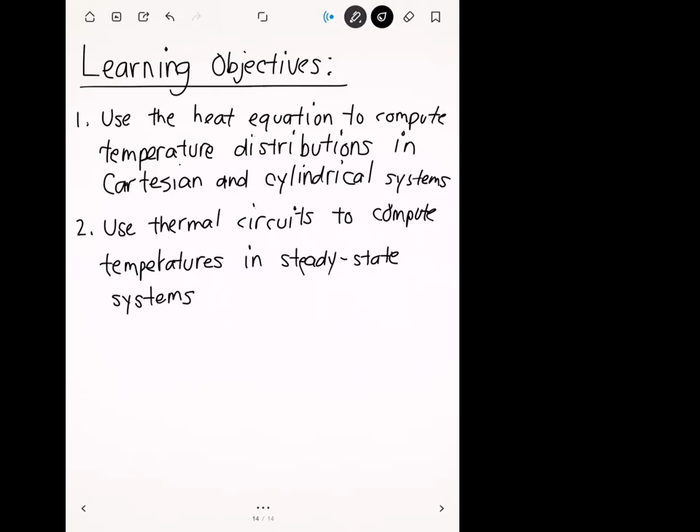So I finished writing up the homework yesterday, and I'm glad that people have already taken a look at it and started, because I think that'll make today's lecture a lot more worth it.

So the first thing I want to do today is a couple of examples. One is a heat equation example, where we're going to take the whole heat equation, integrate it, and apply boundary conditions — that should help you out on problem 2. The other example we'll do today is a thermal circuit problem, which should help you out on problems 3 and 4.

After that, we'll probably have some time left, so we'll start the next set of lecture notes, which is on radial systems. We'll see how the same concepts we've been learning apply to cylindrical coordinates and then eventually spherical, although I don't think we'll get to spherical coordinates today just yet.

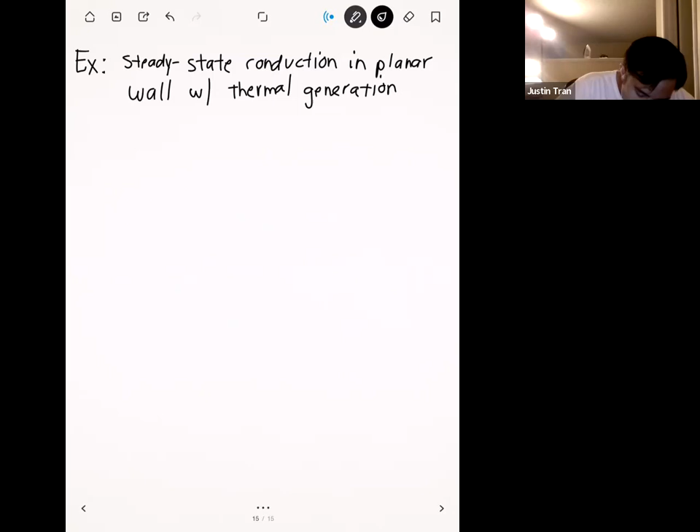Basically we're assuming that maybe this wall is laced with a chemical that's reacting and producing heat, or maybe it's a material that absorbs heat from somewhere else. So the diagram looks something like this: here's our planar wall, and just like before, we're viewing a cross section of the wall.

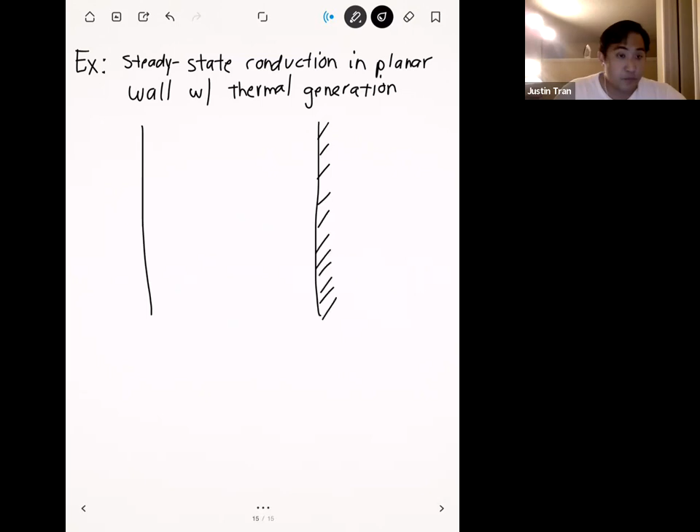On the left side of the wall we have convection going on. The three arrows indicate that fluid is flowing past the wall. The ambient temperature of the fluid is about air temperature, maybe a little chilly outside, so the ambient temperature is 20 degrees C, and the convection coefficient is 500 watts per meter squared degrees C.

We also know the thickness of the wall. The length of the wall is 50 millimeters, and the thermal conductivity K of the wall is 5 watts per meter degree C.

One more thing we have, which is actually a little unique for this problem: usually with a convection boundary condition you don't know the surface temperature, but in this case we do. The temperature of the wall, which we'll call TS for surface temperature, is 120 degrees C.

On the right side of this wall, notice I've marked it with hash marks, which indicates that side is perfectly insulated. If you recall from previous lectures, when something is perfectly insulated, no heat can escape through that wall, so the heat transfer rate through that wall is going to be 0.

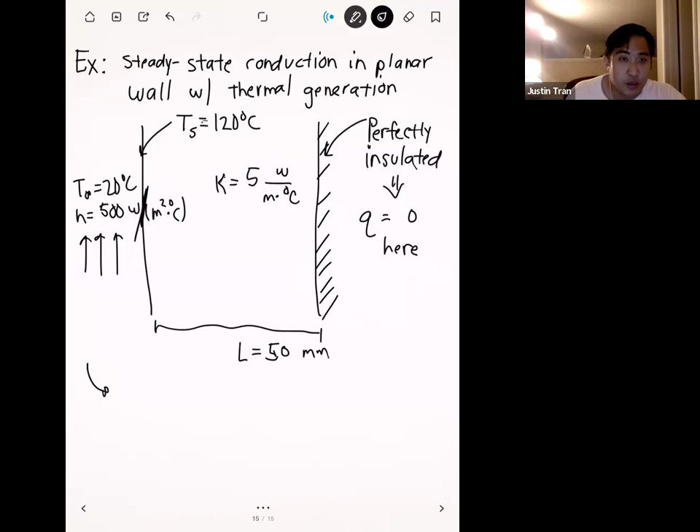Alright, I think that's all. So what we're interested in solving for here is the heat equation for the temperature distribution in the wall.

Okay, so that's part A of the problem. Part B says that, given these thermal conditions, we want to solve for how much heat the wall has generated.

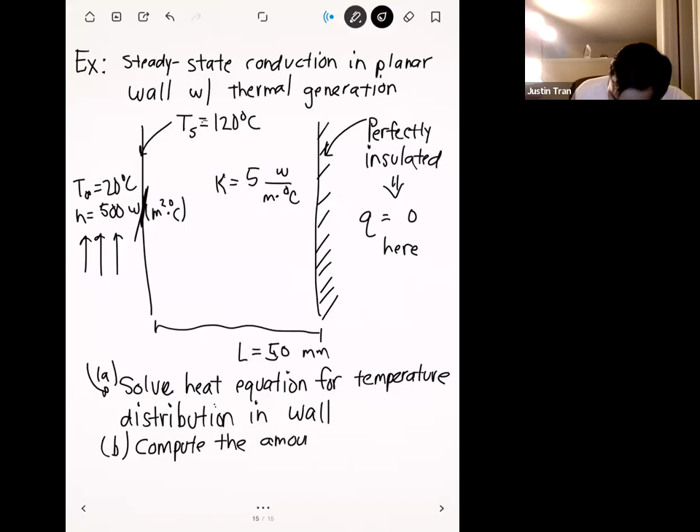In other words, what we're solving for here is the value for Q dot. Basically, we're going to take our solution for part A, along with all the boundary conditions we have on this problem, and use that to solve for Q dot.

Notice that we actually have 3 boundary conditions here, which is a little unusual. Usually we're only given 2, since we only need 2 boundary conditions to solve a second order ODE. But we have an additional unknown, the thermal generation, so we need three boundary conditions: our insulated condition on the right, our surface temperature on the left, and a convection boundary condition as well. These are the 3 boundary conditions we'll use to solve parts A and B.

Before I move on, since I got a few questions about this last night, I want to draw a distinction between these two things. I got a lot of questions asking about problem 2: is it correct to apply a specified temperature boundary condition when you have convection like that? I was telling people that would not be correct, because even though we have fluid flowing with a certain temperature on the outside of our surface, that doesn't mean our solid surface has the same temperature. In fact, most of the time they're quite different from each other.

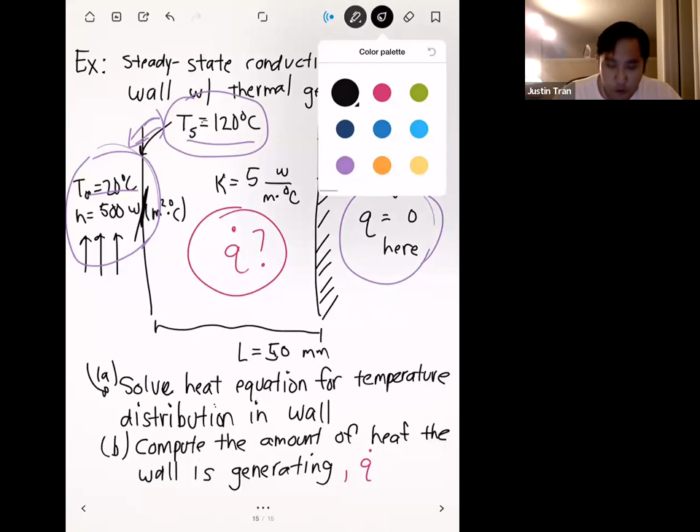Let's start with part A. Since we're looking for a temperature distribution in this problem, remember, temperature distribution means we're going to solve for a function T of x. That means we know this is a heat equation type problem. So let's go ahead and start from the full heat equation.

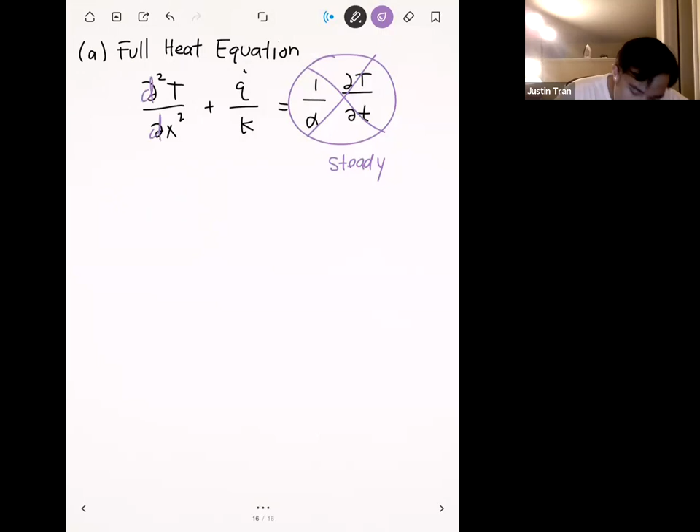Our full heat equation is partial squared T partial x squared plus q dot over k equals 1 over alpha partial T over partial t. The first thing we're going to do, just because it said so in the problem, is cross out this term right here, because we're assuming the problem is steady. By doing that, since we eliminate the time derivative, these derivatives on space become regular derivatives.

Now that the right-hand side is equal to 0, I'm going to move the q dot over k to the left-hand side. So we have d squared T dx squared is equal to minus q dot over k.

We don't know what q dot is yet, but we are going to assume that it's constant. That helps us out a lot because it allows us to directly integrate this expression, so we're going to have dx. Let me go ahead and write that down: assume constant.

On the right-hand side, we basically just have a number, a scalar. So if we take the integral of both sides, on the left-hand side we're left with dT dx, and on the right-hand side we have minus q dot over k times x plus c1, because the integral of a constant is just that constant times x. And since we're doing an indefinite integral, we have to add an arbitrary constant c1.

Then we're going to integrate this one more time in order to get T of x. We integrate one more time and we get minus q dot over 2k times x squared plus c1 times x plus c2, where again the c2 comes because we're doing an indefinite integral and we have to add our arbitrary constant. And so here is our general solution.

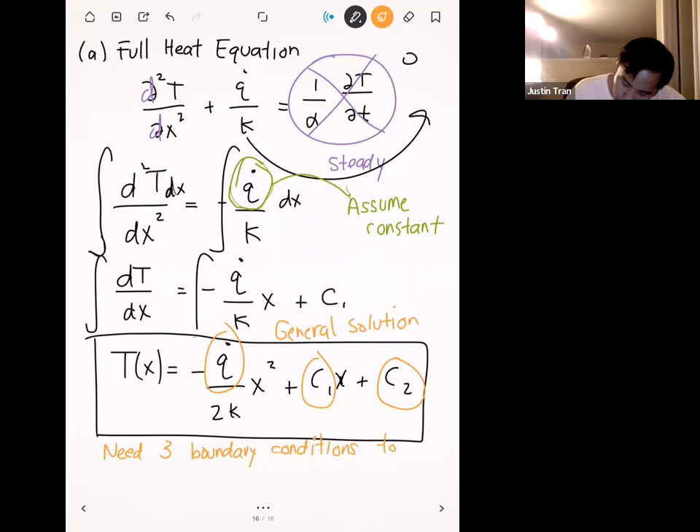And so we're going to use our 3 boundary conditions to solve for those values. On the next page, I'm going to write out our 3 boundary conditions in mathematical form, and then we're just going to simply apply that to the equation, in order to get its value. Any questions on this?

And so we have 3 boundary conditions in this example.

All right, so our first boundary condition is a specified surface temperature at x is equal to 0. Remember that surface temperature was Ts equal to 120 degrees C, right? And so in mathematical form, we can express this by saying that our temperature distribution at x equal to 0 is equal to 120.

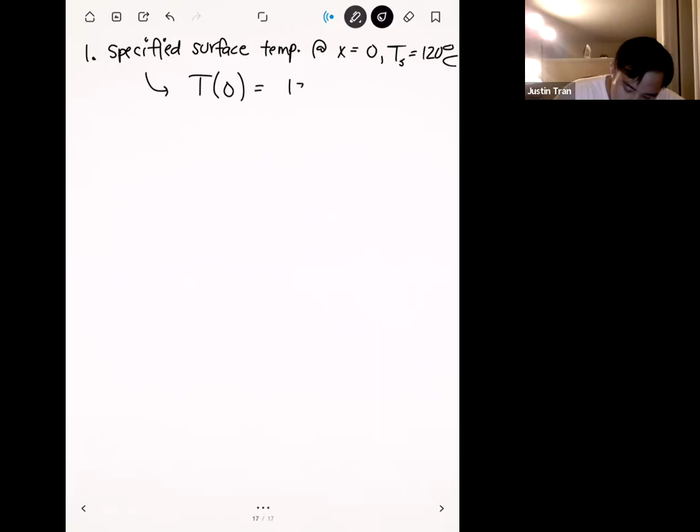Is this for part B? This is still part A. So part A, we're still solving for C1 and C2.

So this one's actually really easy to apply, so let's go ahead and apply this one first. This isn't the formal textbook way to approach these problems, but it's a good trick. Usually whenever you have a general solution that depends on x, applying the boundary condition at x equal to 0 is usually a good first way to go, because a lot of terms are just going to cancel, especially if it's a specified temperature boundary condition like this.

So let's go ahead and apply this right away because we know a lot of terms are going to cancel. If we go back to our general solution: minus q dot over 2k times x squared plus C1 x plus C2.

If we apply this at x is equal to 0, we're basically going to plug in 0 at every location where we have x. So we have 0 here, 0 here, and that's going to cancel out all of those terms, because we have 0 times a constant, which is 0. And according to the boundary condition, if we apply x equal to 0, then we're going to get 120 degrees C.

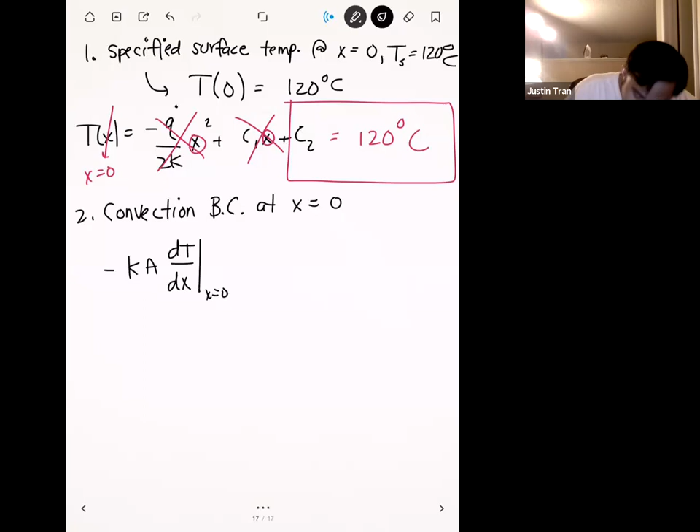And so it's a balance between conduction and convection. For the conduction side, we have Fourier's law: minus k times A times dT/dx, at x is equal to 0. This side of the equation is conduction, because it's Fourier's law.

And so the other side of the equation is going to be our convection. For convection, we use Newton's law of cooling: H times A times T infinity minus T at 0.

And so when you have a convection type boundary condition, we have to set both of these equal to each other. The key thing to notice here is that for these two entities, we're going to plug in our general temperature solution.

All right, so let's go ahead and plug these in. The good thing about the right-hand side, T at 0, we already know what that is because we solved for it in condition 1. We know that this one is 120 degrees C. So the only goal here is to plug it in for the other one.

All right, so if we go ahead and take the derivative of our general solution, the derivative of our general solution is minus q dot over k times x plus C1.

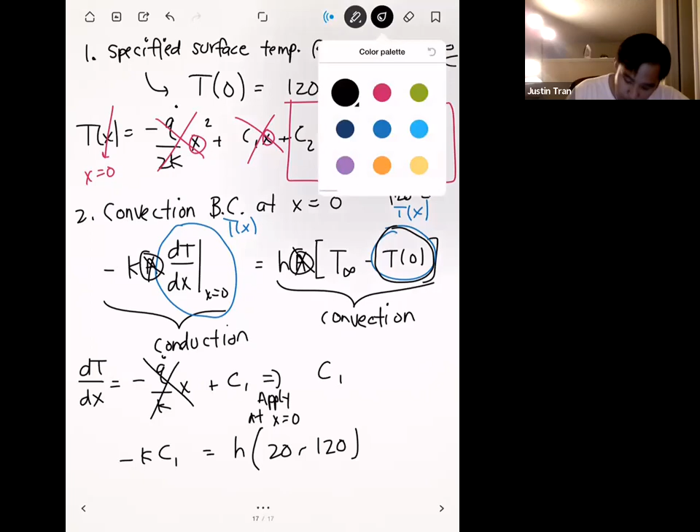K here has a value of 5 watts per meter degree C. And H here has a value of 500 watts per meter squared degree C. Those are given to us directly in the problem. So the only unknown we have in this equation right now is C1. And so we can go ahead and plug all the values in and solve for the value of C1.

Any questions on how we applied this convection boundary condition? I had a question, Professor.

Could you go over one more time why you use negative q dot over kx plus C1, when dT over dx is equal to negative q dot over kx plus C1? Sure. That's simply just the derivative of our general solution, which is this one here from the previous page. So all I did was take the derivative of this expression with respect to x. Oh okay, so that's dT/dx, that's what that's equal to. Gotcha. Exactly. And actually, because we got this by integrating our heat equation, you can see that we actually have the expression for dT/dx right here on the spot, right before we got to our general solution. So just plug that in on that side. Thank you.

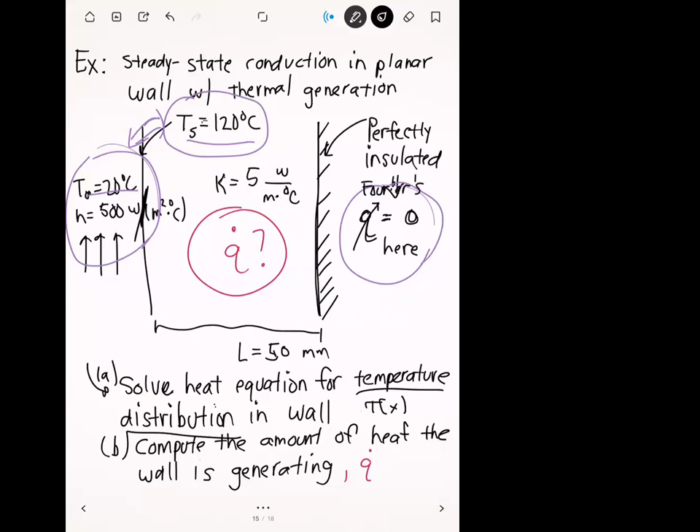And this is all going to be equal to 0 because of the insulated wall. So let's go ahead and plug that in. Right now we have minus k times a, and actually, because we have 0 on both sides, we can go ahead and divide by k times a on both sides of the equation, and that's going to cancel those out. So we have simply dT/dx at x equal to L is equal to 0.

If we plug in our expression for dT/dx, which is minus q dot over k times x plus C1, we have C1, and C1 is 10,000. In this case, we're going to plug in x is equal to L, where L is 50 millimeters, which is 0.05 meters. Then we can go ahead and solve this expression for q. So we plug everything in, we get minus q dot all over k, where k is 5 watts per meter degree C, times 0.05 meters, this is equal to minus C1, and that's minus 10,000.

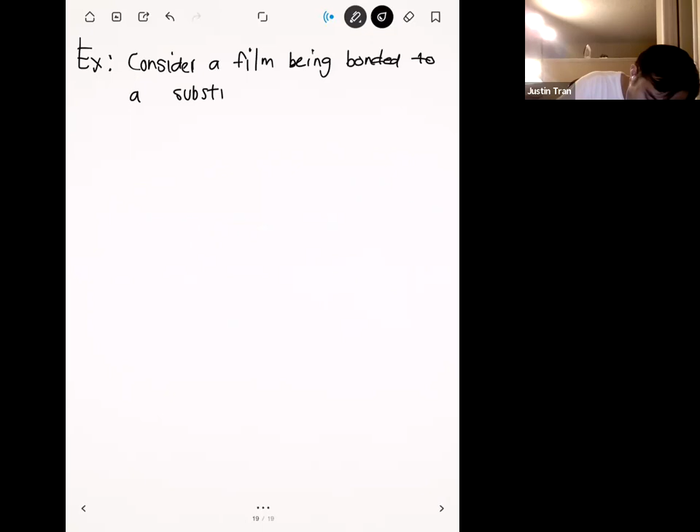I don't think we've discussed what heat flux is, so I'll make sure to talk about that once we get there. Basically, what's happening is that the laboratory is applying some kind of radiation to heat that interface between the film and the substrate.

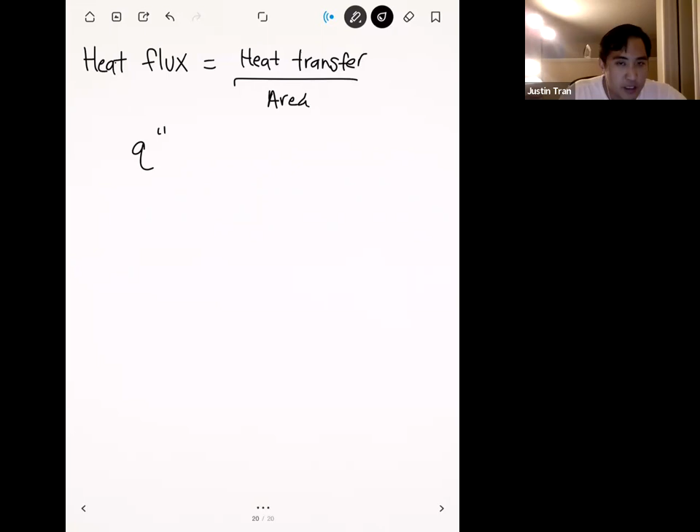The most common symbol you'll see for heat flux is usually given the double prime sign. The relationship between Q double prime and Q is that Q double prime is equal to Q divided by A. So that's all that heat flux is. Heat flux is simply just little q, divided by A.

All right, so let's start with part A. Part A of the problem is we're going to draw the thermal circuit that represents the situation.

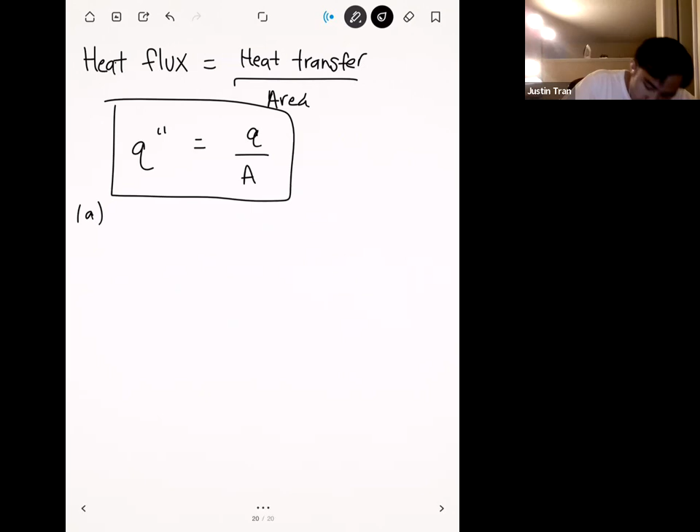We have 3 resistors here because we have the 2 solid layers, and we also have convection. So we're going to draw 3 resistors.

We'll call this resistor R air, because this is the convection resistance of the air. This is going to be the conduction resistance of the film. And then that resistor is going to be the resistance of the substrate.

Okay, so let's go ahead and fill in the values for these resistances. Remember, convection resistance is just going to be 1 divided by H times A.

The film resistance here is just going to be LF divided by KF times A. And then the substrate resistance is just LS divided by KS times A.

And the next thing we're going to draw in is the interface between the film and the substrate, because that's where things are going to take place.

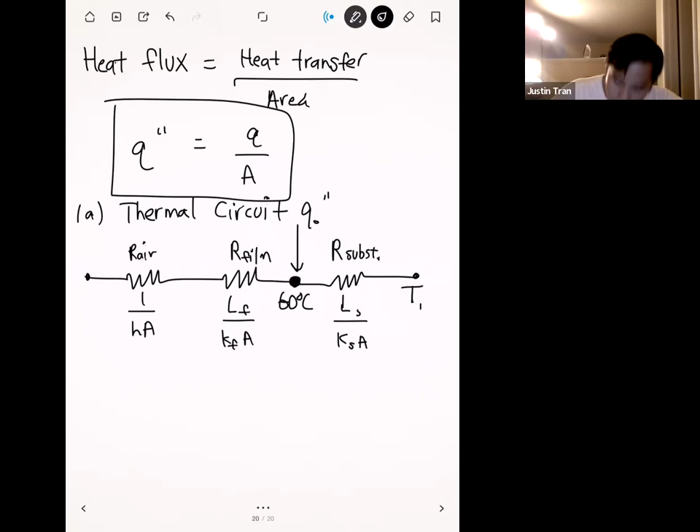The last thing I'm going to fill in on the circuit here are the end temperatures. When we go from the interface down to the bottom of the substrate, we're going to end up at the substrate back temperature, and so that's T1. If we go from the interface through the substrate, the temperature of that node there is T1.

Whereas if we go the other way, upwards past the film and past the convection layer, then we end up at T infinity. So the other end temperature here is going to be T infinity.

Any questions on how we constructed that thermal circuit? All right, and so now that we have the thermal circuit constructed, we can now use that to actually compute the amount of heat that's going in both directions.

Because if we connect this to the figure, this node right here is a higher temperature than T1 and T infinity, heat is just naturally going to go in those directions. So we're going to apply two calculations on the circuit, which accounts for heat going in each of those directions.

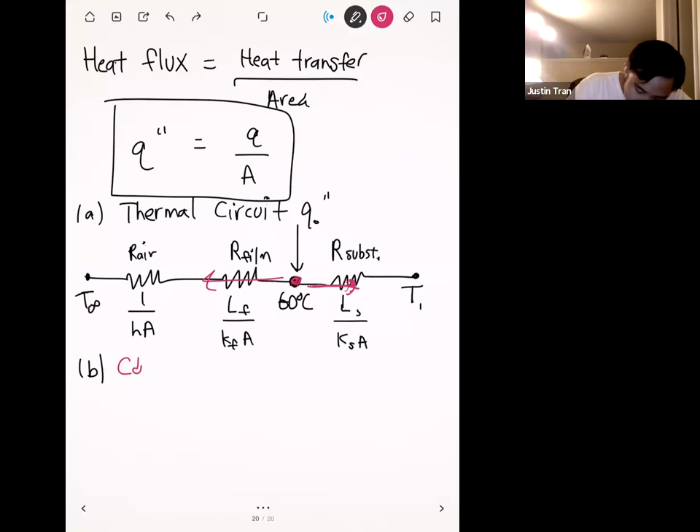So let's compute the heat that goes right first. This is going to be the heat loss to the substrate.

If you remember, the way that we compute heat transfer rates from a thermal circuit is we take a difference of the temperatures. In this case, we take a difference between 60 degrees C, which is the nodal temperature at the interface, minus T1. T1 was 30 degrees C.

And we divide by the resistance in between them. The only resistance between our interface node and the substrate node is that single resistance of the substrate. So we divide this by Ls divided by Ks times A, okay? And this is equal to Qs, or Q substrate.

We have basically everything here to compute what that Qs is. But before I do that, actually we don't have one thing, and that one thing is the area. So in order to get rid of the area, I'm just going to divide both sides by area.

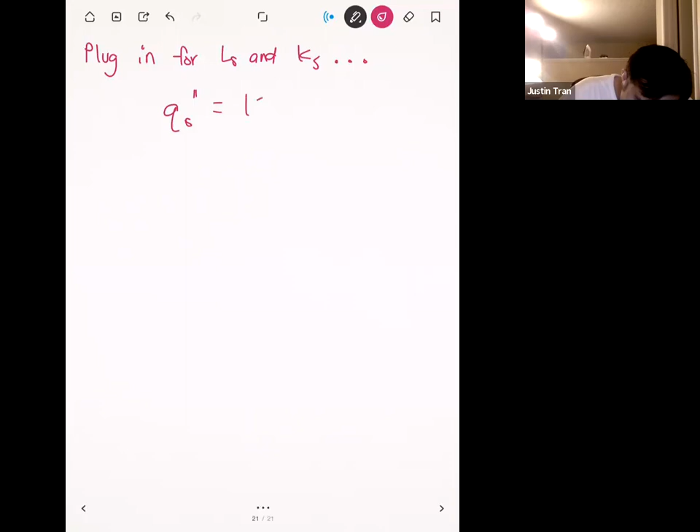So we plug in for Ls and Ks, and I don't have those numbers here in front of me, so I'll just say dot, dot, dot. If we plug those in, we get Qs double prime is equal to 1500 watts per meter square. That's the heat loss that goes through the substrate.

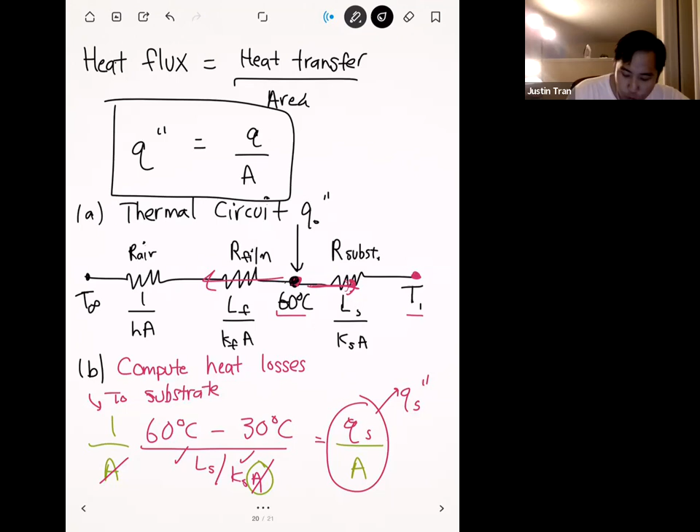Now let's compute the heat loss to the air. If we go back to our thermal circuit here, the heat loss to the air: we start again at our middle node, 60 degrees C, and then to get to the air, we actually pass through two resistances here.

So our Q air, we'll call that QA, is equal to 60 degrees C minus T infinity, where T infinity is 20 degrees C.

And we cross over two resistors here. First we cross over the convection resistance, 1 over h times A, plus the film resistance, which is LF divided by KF times A.

I'm going to do the same trick I did for the substrate, dividing both sides by A just to get rid of the A's down here since we don't really know it. So we get QA double prime is equal to 60 minus 20, which is 40, divided by the thermal resistances: 1 over H plus LF over KF.

We simply plug in for everything on the bottom because we're given the convection coefficient and all the parameters for the film. If we plug all those in, we get QA double prime is equal to 1,333.33 repeating, watts per meter squared. And so that's the heat loss to the air.

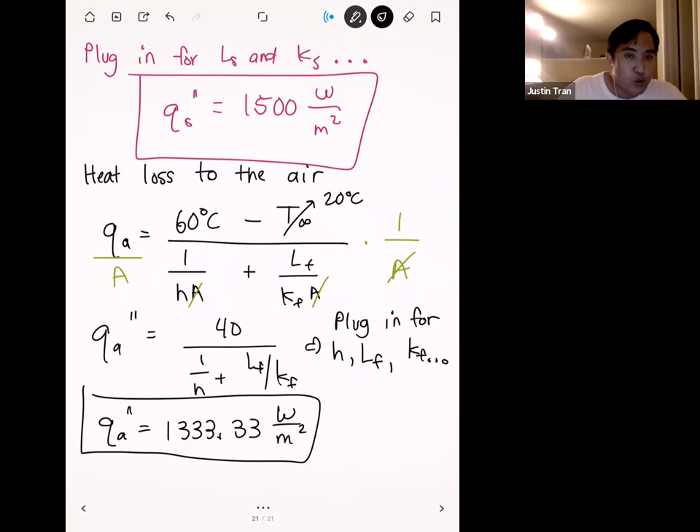Now that we have the heat loss to the substrate and heat loss to the air, we know that our applied heat, which is Q naught double prime, has to basically balance these two out. So our total amount of heating that we have to apply is just the sum of these two things together. Finally, Q naught double prime is equal to Qs double prime plus QA double prime, because in order to maintain 60 degrees C, we have to balance out all these heat losses, so we add them together.

We get 2,833.333 repeating, watts per meter square, and that's the answer to that example.

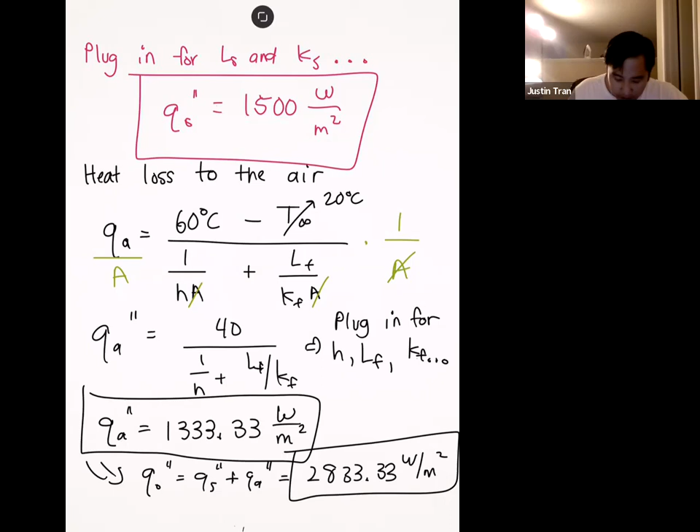Any questions on this example here? The Q naught is the heat needed. Yes, that's the heating that we're applying. If you remember from the problem statement, we're applying basically a heating to this interface between the film and the substrate, so that's the value or magnitude of the heating that we're applying.

Quick question, Professor. Sure. Mm-hmm.

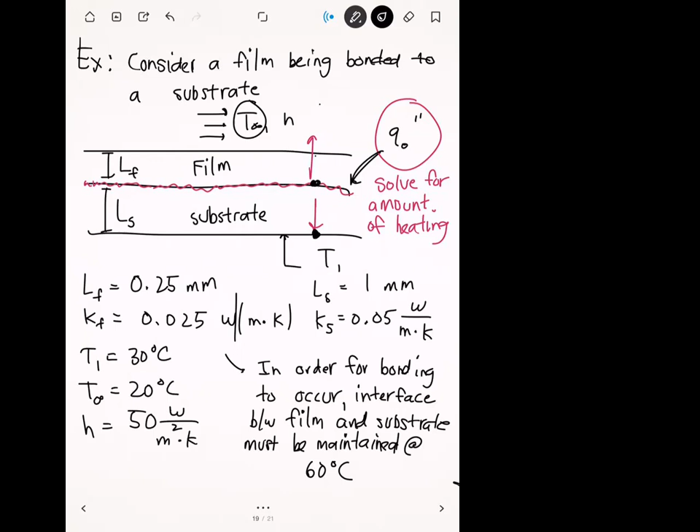So our K's and H's were in terms of Kelvin, but our temperature was in degrees Celsius. Did we take that into account? Yeah, that's a great question. Those two can actually be used interchangeably, because the conversion between them is just a simple addition. Sometimes I did get a little lazy here, because if you want to be more clean, it should all be in terms of the same thing. But I just kind of read it straight off my example, which had Kelvin. If you do want to be more clean, you can just convert all the Kelvins to degrees C.

Okay, all right, and so that's our thermal circuit example. That should hopefully help you out with problems 3 and 4 on the homework. Okay, and so that does it for our first set of lecture notes, and that's planar conduction in the books.

And so we have about 25 minutes left in class, and I do want to start the next set of lecture notes, which is conduction in radial systems, or polar systems.

I think this is the part of the class which seems really scary to people, just because it's only week 2. If you guys feel the same way I did back when I was in college, cylindrical coordinates, polar coordinates, spherical coordinates, it always scared the shit out of me. To already see that in week 2 is kind of intimidating.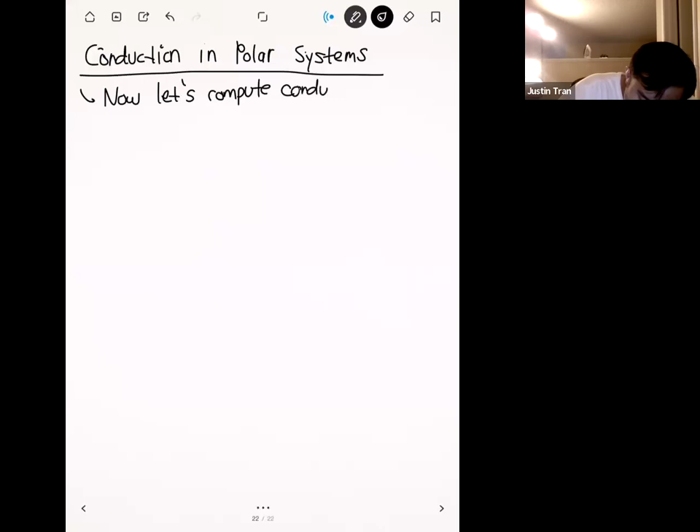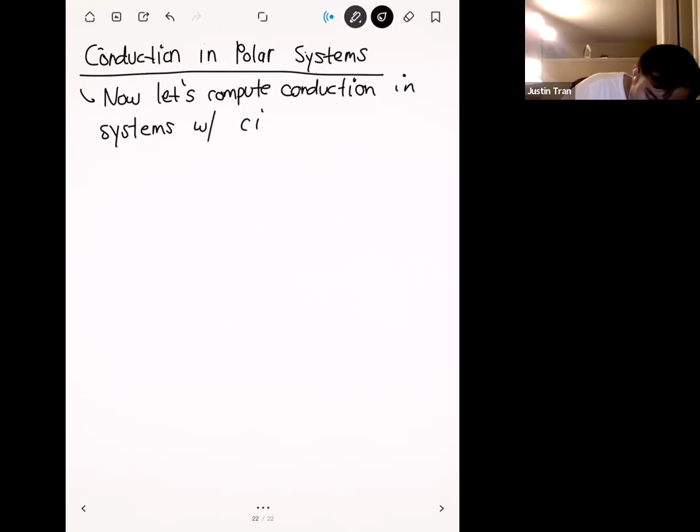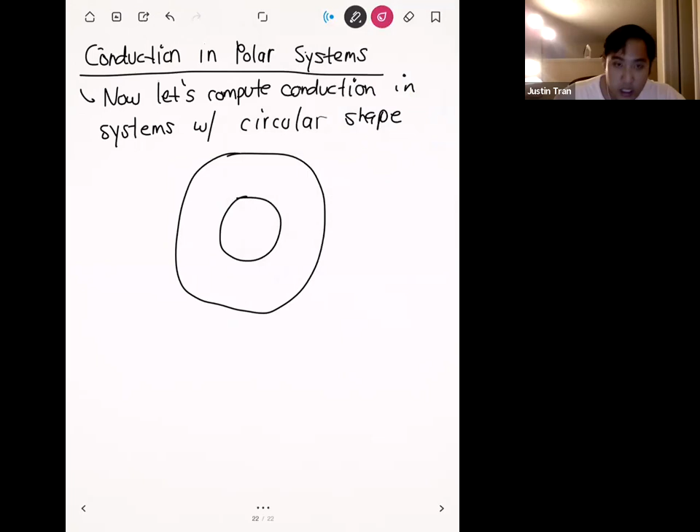So first we're going to look at cylinders, and we're going to work in cylindrical coordinates. Later on, we're going to do spheres, probably next week. Even though these systems are technically two-dimensional, if we draw a cylinder and think about the heat flow through it, it's going to be coming out just like that. Now we have Q that's coming out this way.

If we were to look at this system in terms of Cartesian coordinates, we can see that the heat flow is actually in two dimensions. So we have some going in the X direction and the Y direction. But if we switch our coordinate systems to polar coordinates, we actually see that this is actually a one-dimensional heat flow as well.

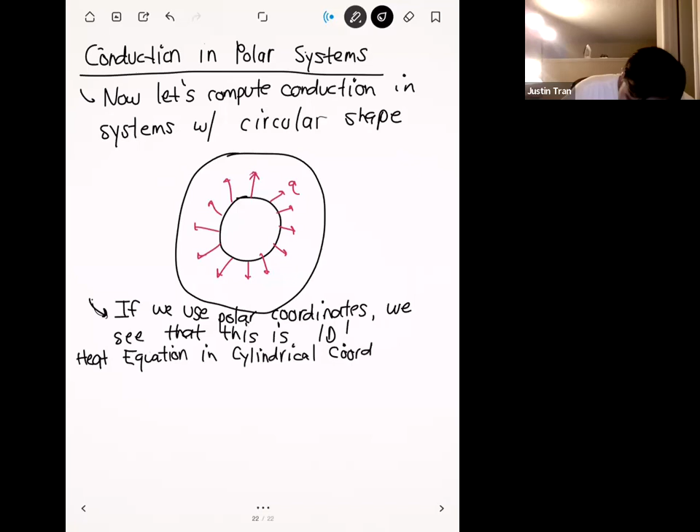1D is great because 1D means that we can actually solve. Okay, so let's just go ahead and get this out of the way, and I'm going to give you the heat equation in cylindrical coordinates. Don't be alarmed just yet. It is a little bit intimidating, but we'll simplify it a lot with our assumptions.

So we have 1 over R, partial R times K times R partial T partial R, plus 1 over R squared, partial theta times partial theta of K partial T partial theta, where theta here is our polar coordinate. Then we have the axial component, which is Z, so you have partial Z of K partial T partial Z. Plus Q dot, which is our thermal production term, equals rho Cp, where Cp here is heat capacity, multiplied by partial T partial T.

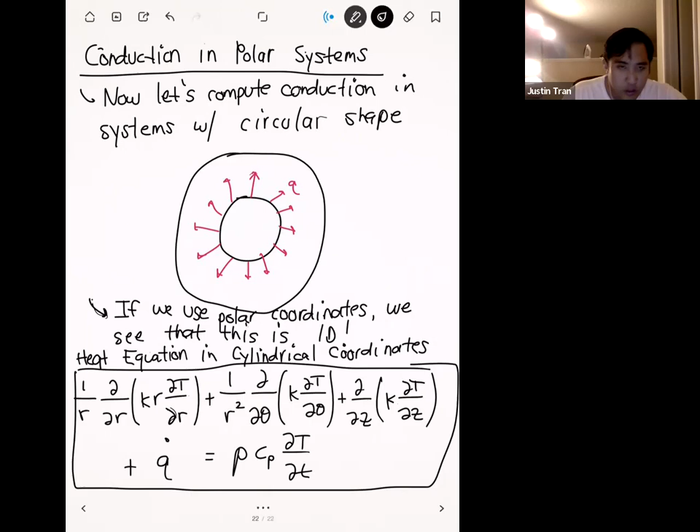And so that's our full heat equation in cylindrical coordinates. All right, so I'll give you a couple of seconds to write that down. But what I'll show you is that there's actually a lot of similarities between this equation and our Cartesian one, just looking at what terms correlate with the other terms.

What does the P stand for in the Q dot equals P in the bottom? That's a rho, so that's density.

In the previous heat equation, I divided this by K and we got 1 over alpha. But I'm leaving that there for now since we're going to assume steady state, so that entire right-hand side will go to 0. But we'll do unsteady conduction in a later week.

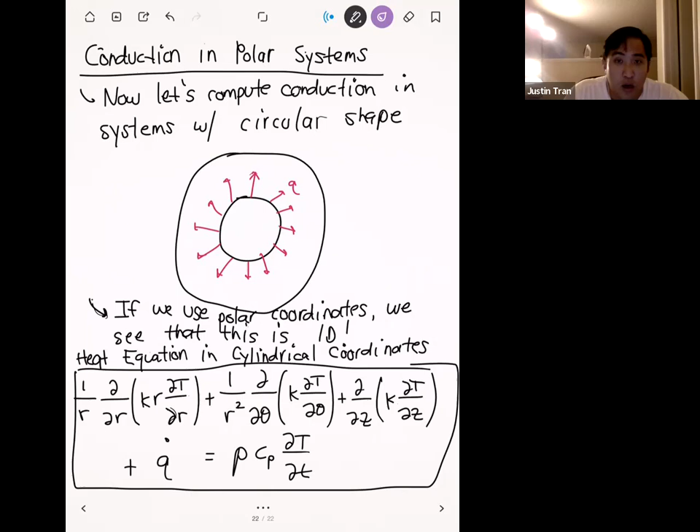Okay, let me go ahead and connect. Let me show you how these terms actually connect with each other, or connect with the Cartesian heat equation, which we just finished talking about.

All these terms here actually go together, and what they all represent is spatial diffusion of temperature. Remember last week we talked about what diffusion means, and that basically means temperature is going to spread out equally in all directions. So all those terms in the equation represent the fact that even though you're in polar coordinates, heat is still going to spread out kind of equally in all directions. It's just that when we quantify the problem in polar coordinates, we have to make some adjustments because the coordinate system is different.

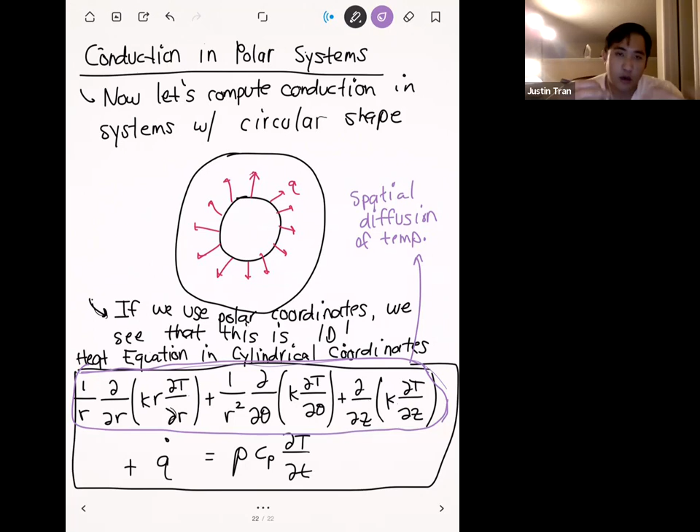So those are the spatial diffusion terms, and those are the terms we're going to work with the most when solving problems. We have our Q dot term, and Q dot here remains the same, so this is our thermal production.

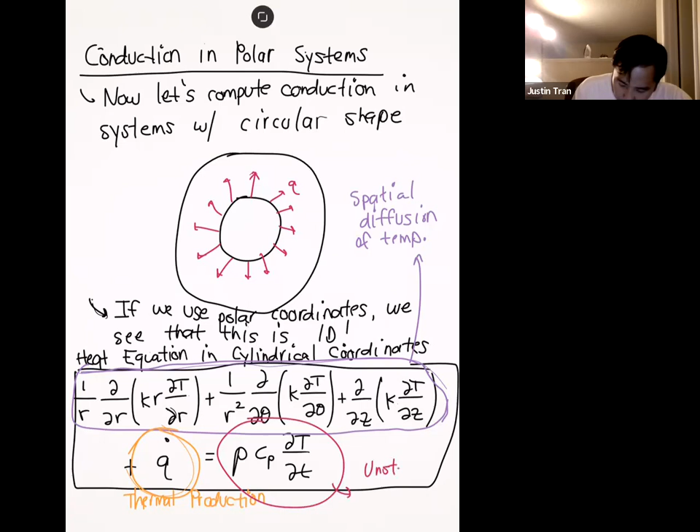And then finally, because we have the time derivative, this is our unsteady term, which we're going to neglect for now since we're just doing steady state conduction. But I did want to show it to you in all its full glory, just so you can always have it as a reference.

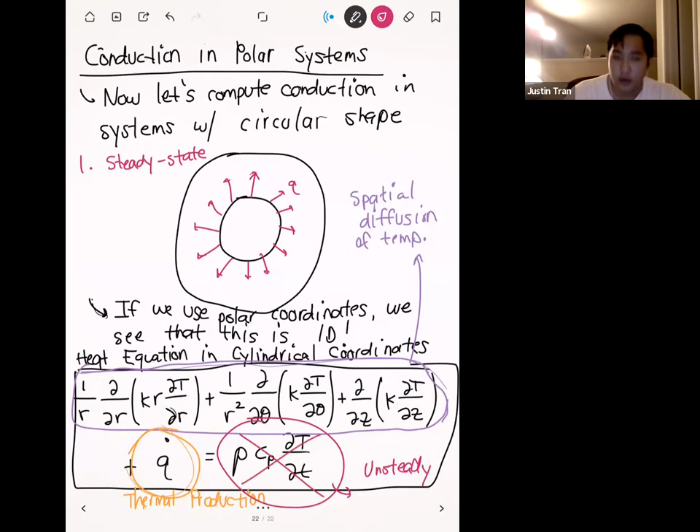Now let's talk about some of the assumptions we're going to make, because we can't solve this equation in its entirety just yet. The first assumption we're going to make, of course, is the steady state assumption. This is going to cross out the unsteady term, so we're just going to get rid of that.

The next assumption we're going to make is the axisymmetric assumption. All that basically means is that any derivatives with respect to theta are going to go to 0. So if we look at the diffusion term, we have a term with a theta derivative, and we're just going to cross that term out.

The last assumption we're going to make is that our temperature does not depend on Z. That means any derivatives with respect to Z are also going to be 0. So if we look at our equation here, I know it's a little messy, but our third term has a derivative with respect to Z, and we're going to cross that one out too.

So all that we're left with here is just 2 terms: the term that depends on R, and our thermal generation, or thermal production term. I'm going to clean this up and write the equation we're mostly going to work with on the next page. Then I think we have time for one more example today.

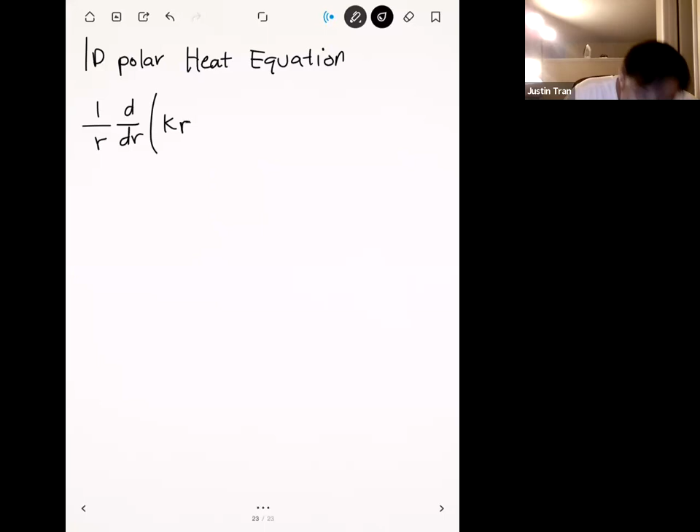That equation should be 1 over r, d dr. I'm converting the partial derivatives to regular derivatives here because we've gotten rid of all the other partials, so we can use d instead of partial. So: 1 over r, d dr of k r dT dr, plus Q dot, equals 0. Of course, if you have a situation where you can assume no production or generation, you can get rid of Q dot, but if you do have it, that's where it goes into the equation.

Now that we have this expression here, let me go ahead and write out the polar version of Fourier's law.

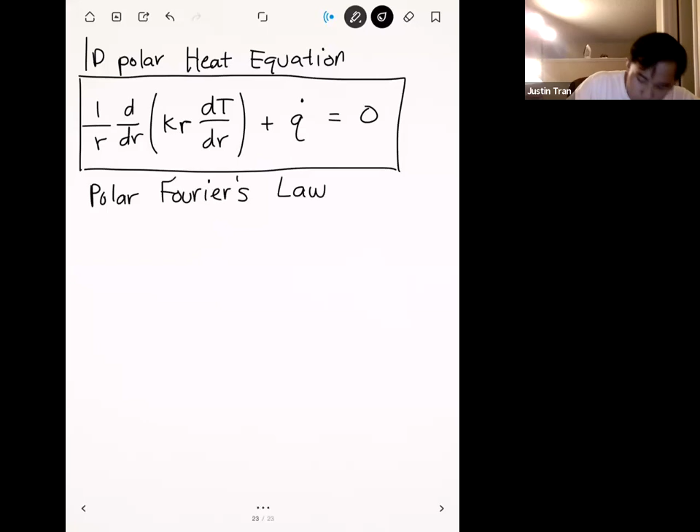Okay, where if we want to compute the heat transfer in the radial direction. And so it's going to look very similar to our Cartesian one. We take the product of the thermal conductivity K multiplied by area, multiplied by dT/dr.

But we can actually take this one step further because we know a little bit more about our geometry. I'm going to plug in an expression here for A. Remember, A here is the cross-sectional area at which the heat is actually passing through. For a cylinder, which is what we're going to be looking at right now, we can actually come up with an expression for that surface area.

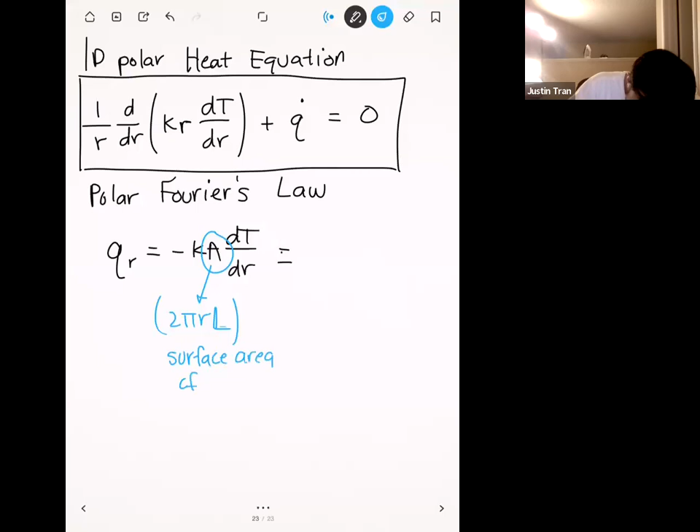If we take 2 pi times r times L, L being the length of the cylinder, this is the surface area of a cylinder. So if we have a cylinder that looks like this, R being the radius, and the length of the cylinder is right there, you can see here that 2 pi r is the perimeter of the circle, and L is the length of the cylinder. If we multiply those two things together, we get the surface area of this cylinder.

So when we're in cylindrical coordinates, we have a little bit of a more specific definition for Fourier's law. We can say this is equal to minus k times 2 pi r times L, dT/dr. That's a little bit more of a specific expression for Fourier's law when we're in cylindrical coordinates.

All right, any questions on this before we do one more example today?

Okay, all right, so let's do a simple example of using this 1D heat equation in cylindrical coordinates. In this example, we have a hollow cylinder, and this hollow cylinder is going to have prescribed temperatures on two different surfaces.

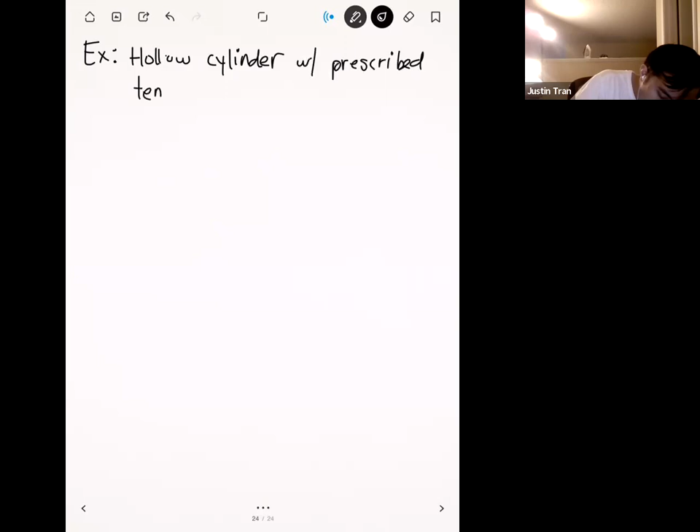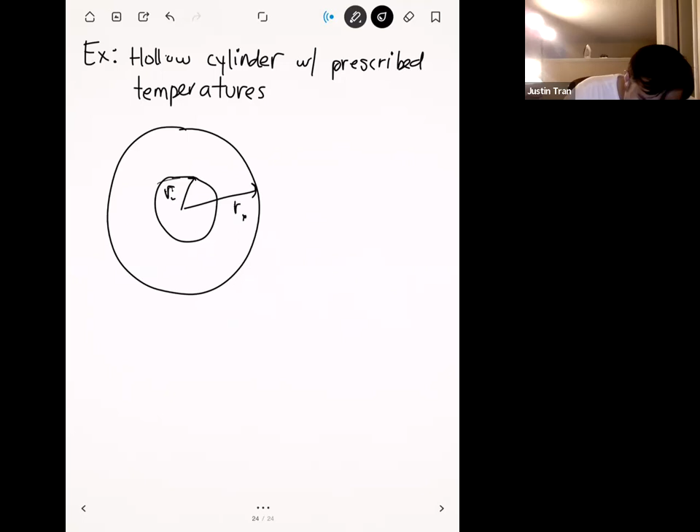Right, so here is our cylinder. It's hollow. We'll say that the inner radius of the hollow cylinder is r sub i, and the outer radius is r sub o. In addition to that, we have the temperatures of the inner and outer surface. The inner surface has a temperature Ti, and the outer surface has a temperature To.

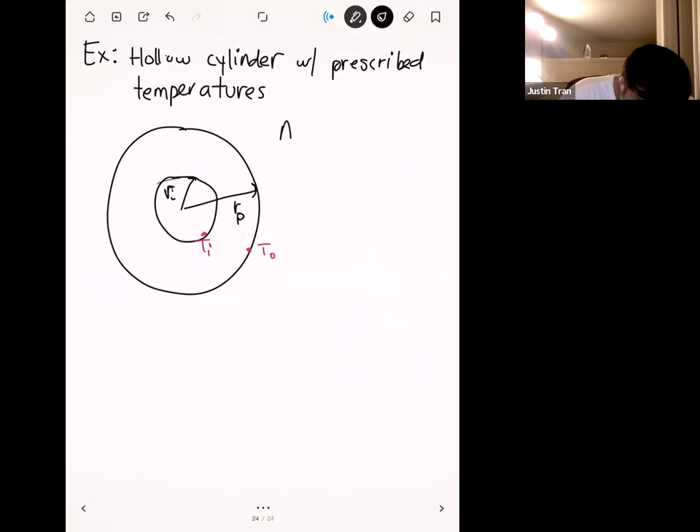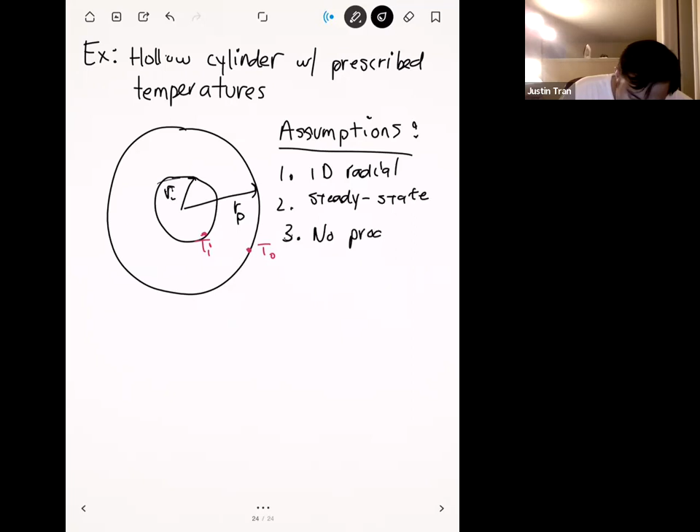All right, so let's write down our assumptions. First of all, we're going to have 1D radial heat transfer, so we can use the 1D heat equation from the previous page. We also can assume that our situation is steady state, so we can get rid of the time term. And for this simple example, we're going to assume there's no production, so our Q dot term is going to go to zero.

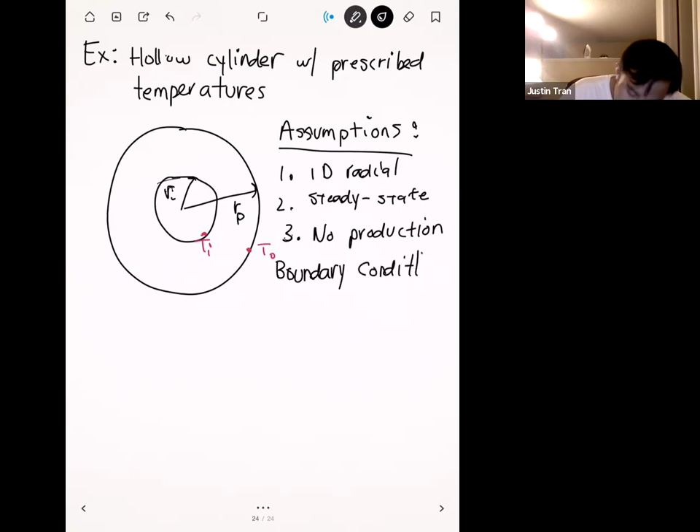Let's list out our boundary conditions as well before we get started. This is kind of like the cylindrical version of the first example we did on Monday, and we have prescribed temperatures both on the inner and outer surface. Our first boundary condition is that T at Ri is going to be equal to Ti. Then T at Ro is going to be equal to To.

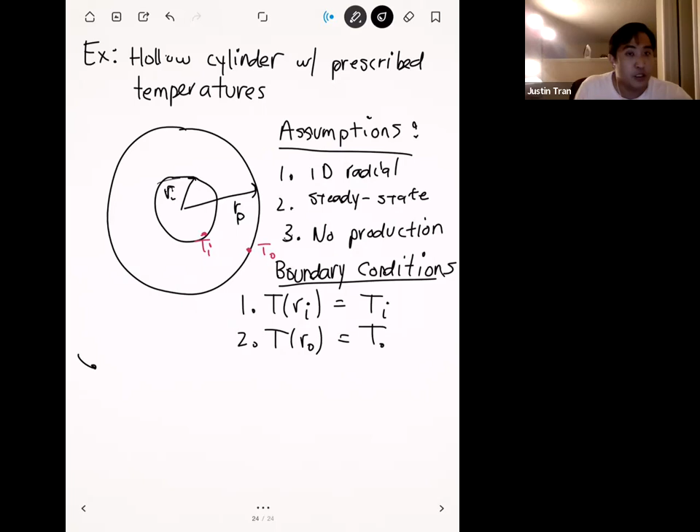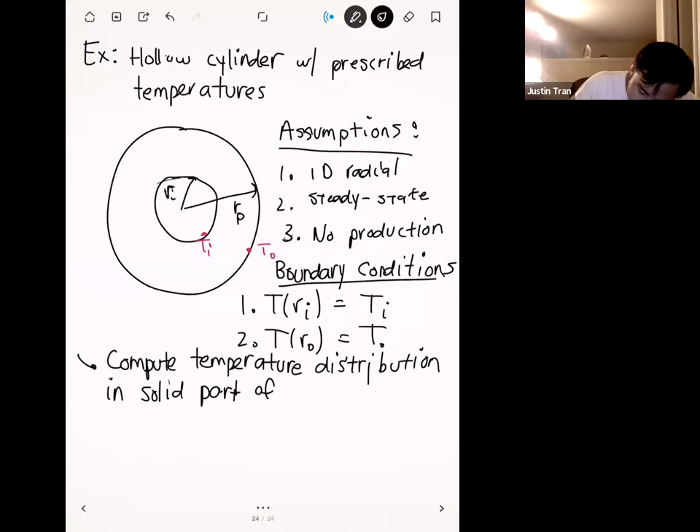And for this problem, we're interested in solving for the temperature distribution in the solid part of the cylinder. To do that, we're going to use the heat equation. Any questions on this?

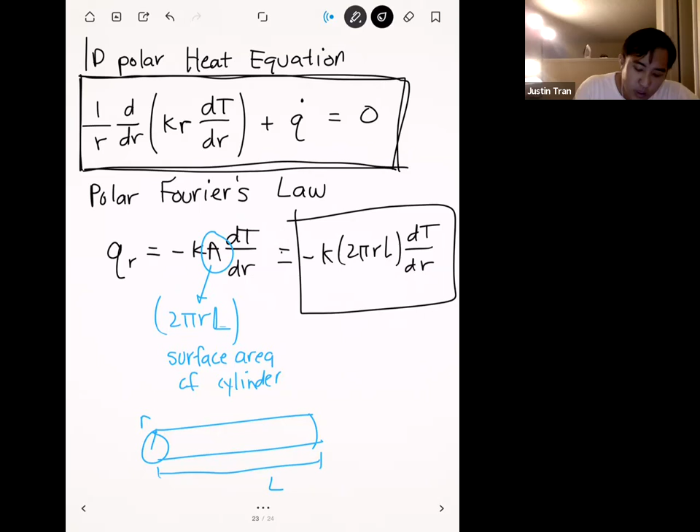Okay, and so now that we've written out the problem, we can go ahead and start solving it. Because we're assuming it's one-dimensional, I'm going to work directly off this equation right here, with one additional step, because we're assuming there's no production, so I'm going to cross out the Q dot term. Our starting point for this, if we assume that K here is a constant, then we can pull K out of the derivative.

Right, so we have d/dr of R dt/dr, and this is going to be equal to 0, because we got rid of the production term. If we multiply both sides by R over K, we can go ahead and get rid of those terms, because we're just multiplying by 0.

And then what we get is d/dr of R dt/dr is equal to 0. And so now that we have it in this form, we are ready to integrate, because we want to get rid of the d/dr.

So let's go ahead and integrate this with respect to R. On the left-hand side, what we have is R dt/dr. On the right-hand side, we're taking the integral of 0, which is normally just 0, but since we're taking an indefinite integral, we have to add our arbitrary constant. So on the right-hand side, we have C1.

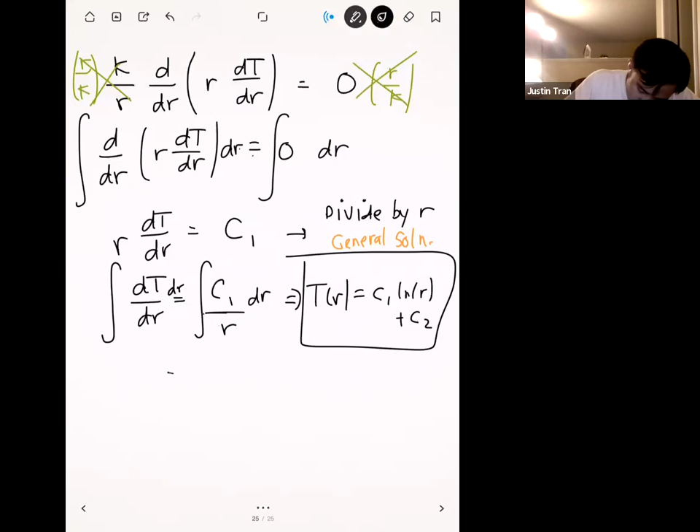So unfortunately, the application of the boundary conditions here is a little bit more complicated because of the natural logarithm. So it's going to take a couple more arithmetic steps, but the whole idea is still the same. I'm going to go ahead and apply both of the boundary conditions at once, because the application of one is not enough to solve for the whole thing.

So if we plug in the boundary condition at r equals ri, what we get is C1 times ln of Ri plus C2 is equal to Ti. Next, we're going to apply the boundary condition at Ro. So we have C1 ln of Ro plus C2 is equal to To.

And so you can see here that we can't directly solve for C1 or C2 outright here, so we need to solve both of these equations at the same time. But there is one kind of neat trick with this, because you can see here that C2 appears in both equations kind of by itself. So we're going to do a trick here where we subtract both equations from each other to get rid of those C2s at the same time.

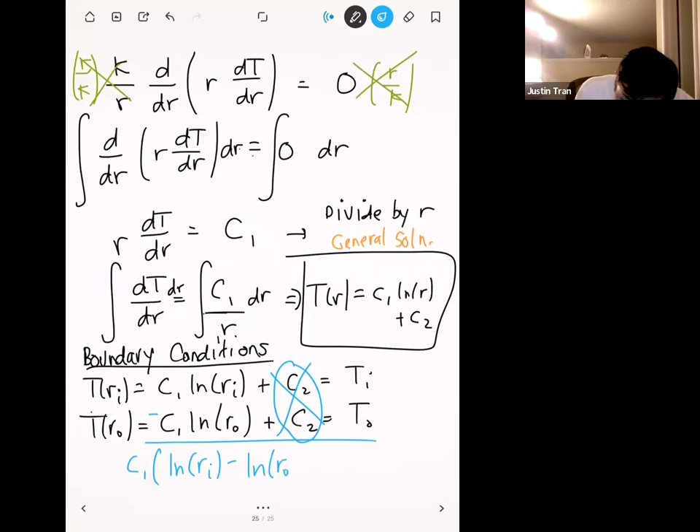And so on the left-hand side, you get C1 times ln of Ri minus ln of Ro, is equal to Ti minus To. And you can see here that since we've eliminated C2, we can go ahead and solve for C1 outright.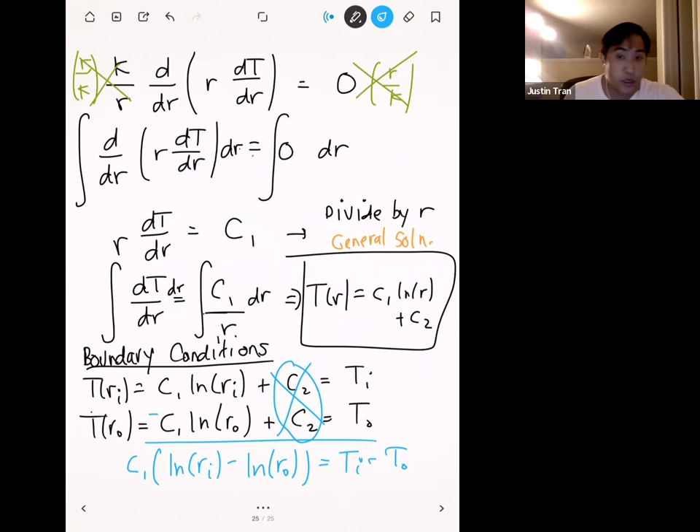But before we do that, I'm going to simplify this term a little bit. Maybe you've seen this before, I know I didn't actually see this until I got to grad school. But if you subtract two logarithms like this, you can actually simplify it into a single expression. So if you have ln of one thing minus ln of another thing, you can simplify that as ln of the first thing divided by the second thing, all within the same natural logarithm.

So that left-hand side, instead of ln of Ri minus ln of Ro, is going to be just C1 ln of Ri divided by Ro. And that just kind of simplifies things a little bit for us. Any questions on this?

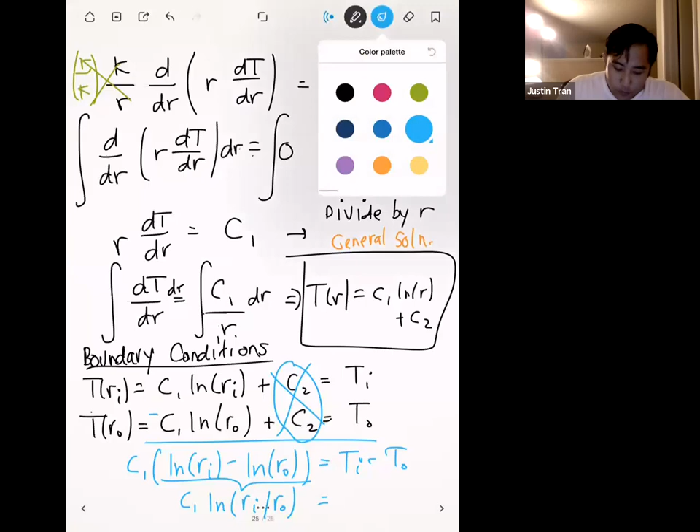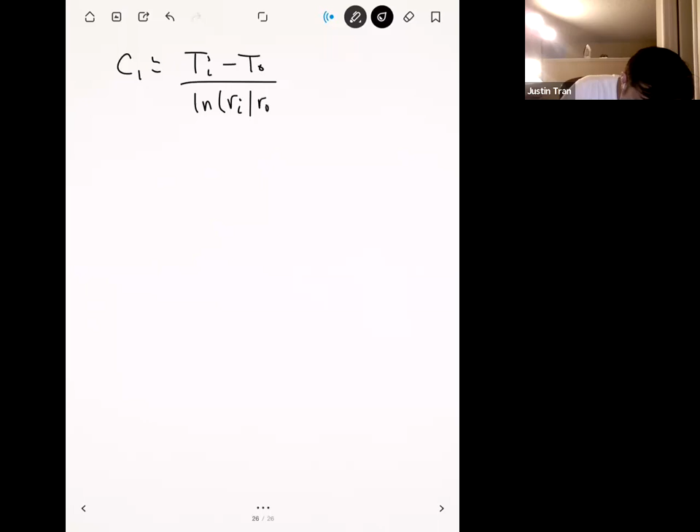And so if we go ahead and divide both sides by that natural logarithm, we get an expression for C1. So we see that C1 is equal to Ti minus To, divided by ln of Ri divided by Ro. And so that's C1.

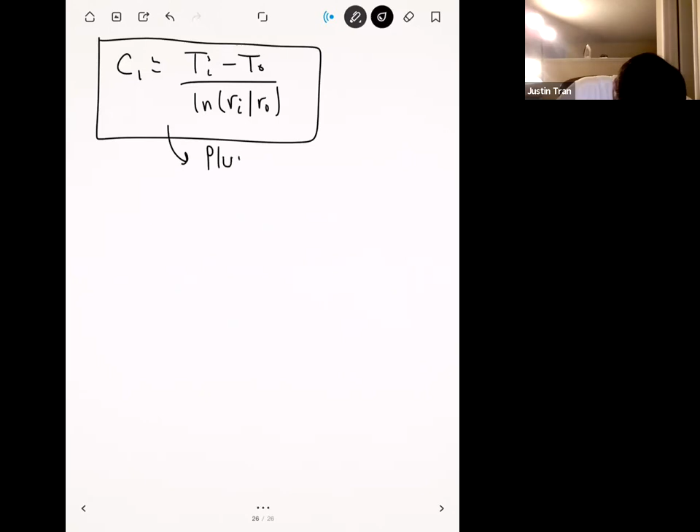And now that we have C1, we can plug this back into either equation to solve for C2 — either of the boundary condition equations. So let me go ahead and plug that into the second one.

Okay, so we plug it into the second one. What we get is this. And so we get our expression for C2, which is To minus Ti minus To divided by ln of Ri divided by Ro, times Ro.

Okay, right. And so that's C2. And so now that we have both C1 and C2, we can plug those back into our general solution here in order to get our full temperature distribution.

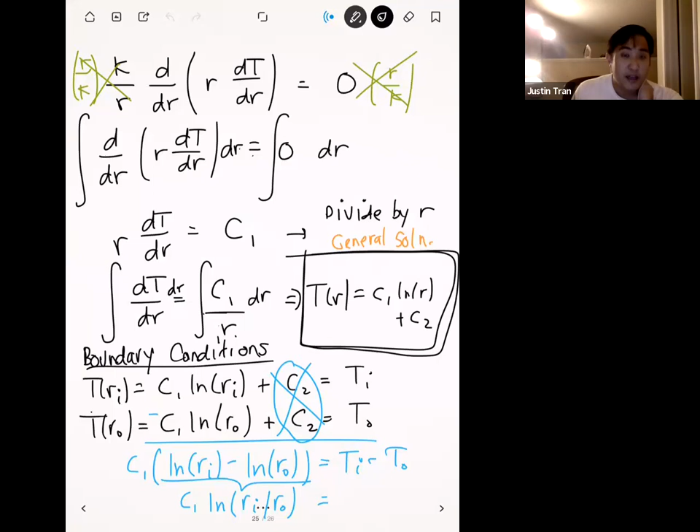One common question that I get is, do we actually get the same thing if we plug into either the first one or the second one? And in fact, you actually do. But it's 3:45, so I don't want to keep you, and I'll just kind of keep you hanging. On Monday when we come back, I'll show you that if you plug in this C1 and C2 back into the original equation, and do a little bit of algebra on top of that, you get exactly the same thing for both.

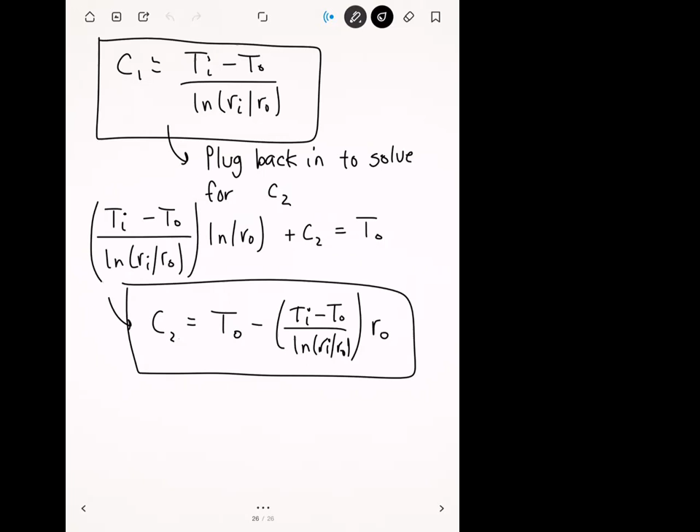All right, any final questions on any of this before we wrap it up for today? Yes sir, I have a question back on the second page on the convection part. Let me handle that after class then. Let's see if anyone has any questions on the cylindrical stuff, back to page 22.

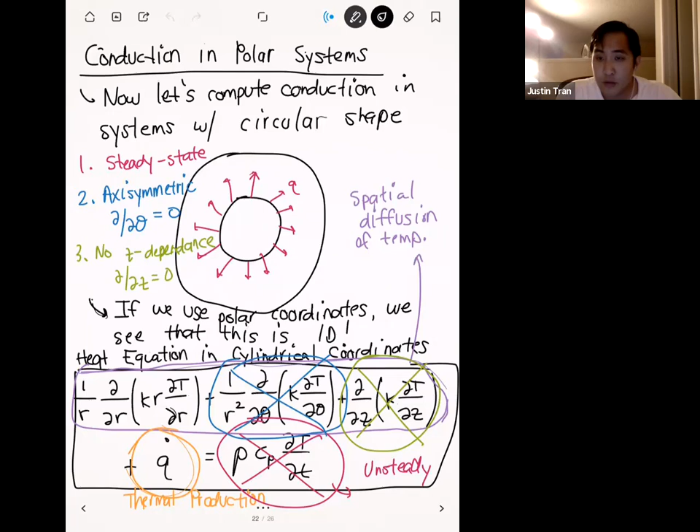All right, Nick, so you had a question back on page 2 of the notes. Yeah, it was a convection boundary condition situation. All right, was it this one or this one? It was that one. So can you, okay, first of all, hold up.

Right under where it says conduction there, the negative q dot over k times x, you drop that because there's no production in the convection part, right? We dropped it because we plugged in x equals 0, basically, because the convection is occurring at x equals 0. The production term here is multiplied by x squared, and if you take the derivative, it's still multiplied by x as well. So when you plug in x equals 0, that production term just drops out of both sides of that equation. Got it, okay, that makes sense.

Thanks, Justin. No problem. See you guys.

I have a question. Sure, what's up? So like, if we need to use the restroom, can we just go? Oh yes, please, yeah, just go. I meant like in person, yeah. Oh yeah, that's fine too. Yeah, if you need to go to the restroom or step outside during the lecture, you can just go ahead and do it, so as long as you're discreet about it and you're not disruptive, then that's fine. And if I miss anything, can I just ask you after? Oh, of course, of course. Thank you. Yep.

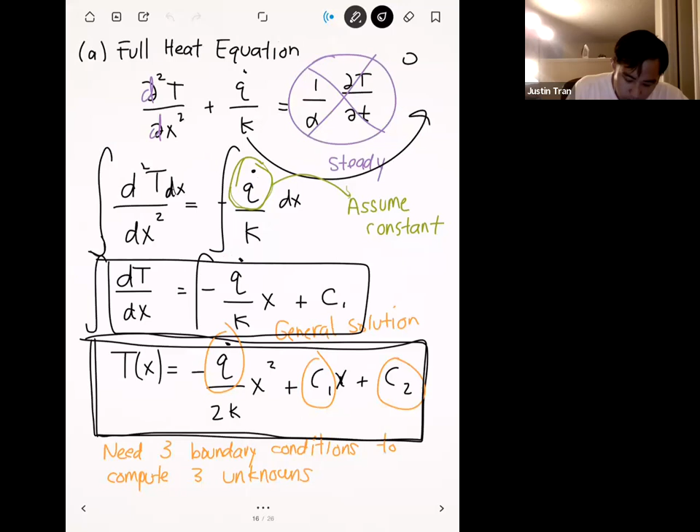Yeah, so this dt dx, I just plugged in our general solution here, and so our general solution here is minus q dot over 2k times x squared plus c1x plus c2. And so I just took the derivative of this with respect to x, and you get minus q dot over kx plus c1. So the Fourier's law is actually this entire expression right here. Fourier's law is minus k times a times dt dx, and then I was just evaluating each of the terms. The only one that needed evaluating was just the temperature derivative.

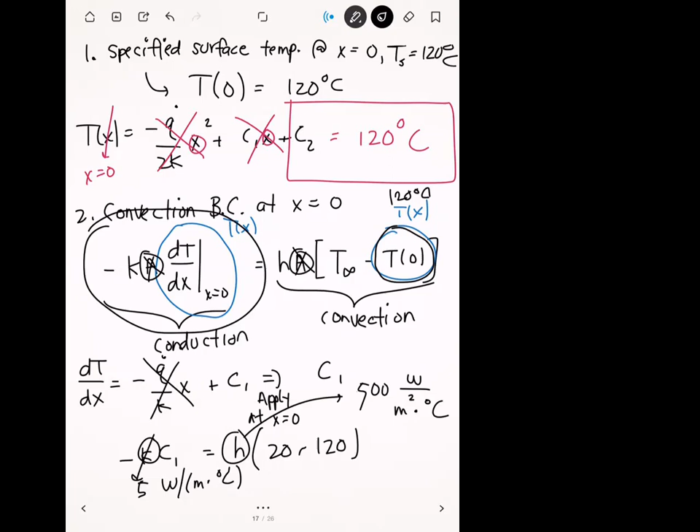Okay, that makes sense. And so this is pretty similar to number 2 on the homework, right, applying this kind of same thought process to the convection part. Exactly. Yeah, so when you go to do the homework, on the right side of the plate, that side has that convection boundary condition, so this is basically how you would do it. Okay, sounds good, thank you. Yep, all right, have a good weekend.